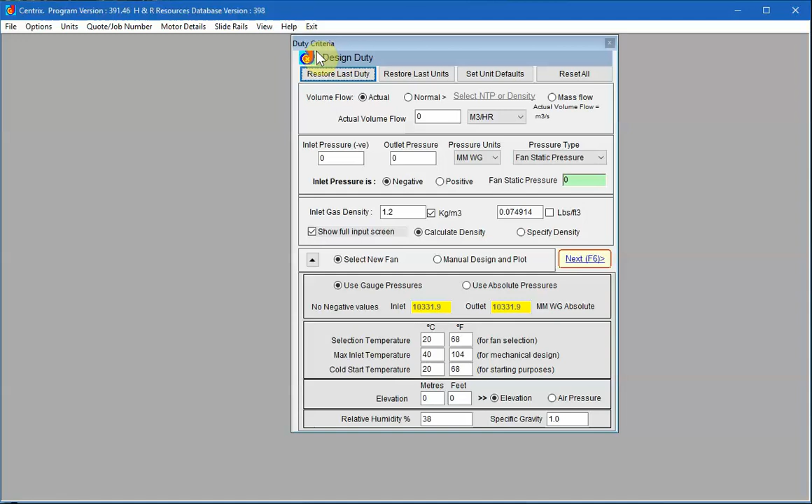Centrix has a large number of motors located in the database. Now, you may want to create a new motor for a particular job. So how do we do that? Well, the easiest way is to copy an existing motor and then save it into the database.

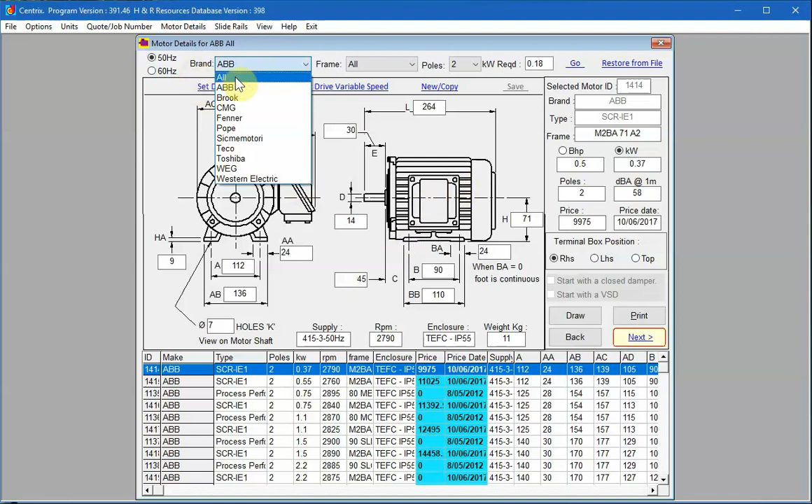So we've got a number of brands here, so we can look at all the brands. 2-pole frames, all 2-pole, 4-pole, etc. We can put in the kilowatts here. So I'll put in, let's say, a 15 kilowatt motor. And we've also got 50 and 60 hertz.

So the first thing to do is, suppose we want a 15 kilowatt motor in some other brand that's not in our list here. And let's say we need a 6-pole motor. Okay, so we've got a 6-pole motor already. Let's have a look at the different ones that we have in the types.

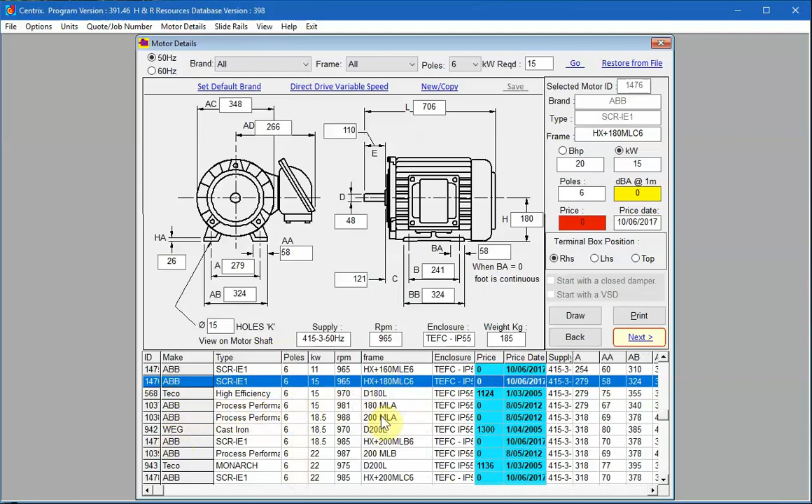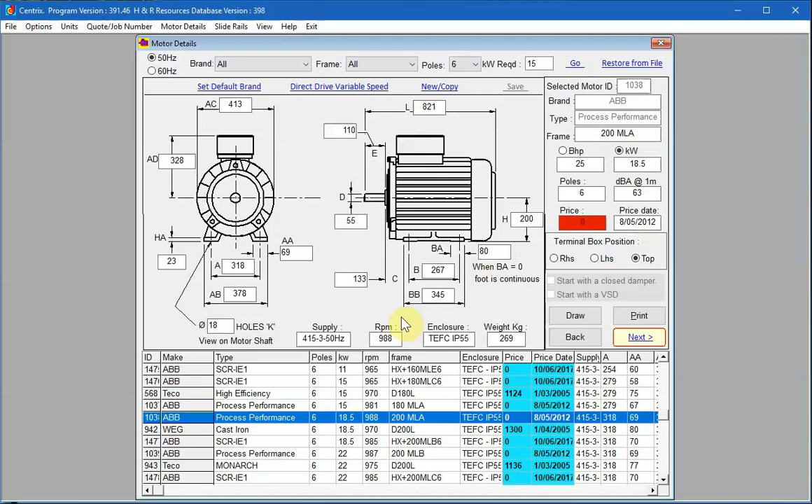We've got an ABB process performance. And we should be looking carefully at the frame sizes here. So we want a 200 frame, and it might be by some other manufacturer. So let's use this with these particular dimensions as our template to create a new motor. So let's just click New Copy here.

Now we can type in the brand. So this is, well, I will call this special brand. The type, well, it could be cast iron, and the frame, we'll say it's a 200L.

Now the RPM's 988. So the best thing to do is to look up these details from the motor catalogue of our special brand here. So let's say that that is 985. The kilowatts might be 15 then, and the poles are 6. The supply may be 415 volts, or it might be 440 volts, or whatever your local 3-phase supply is.

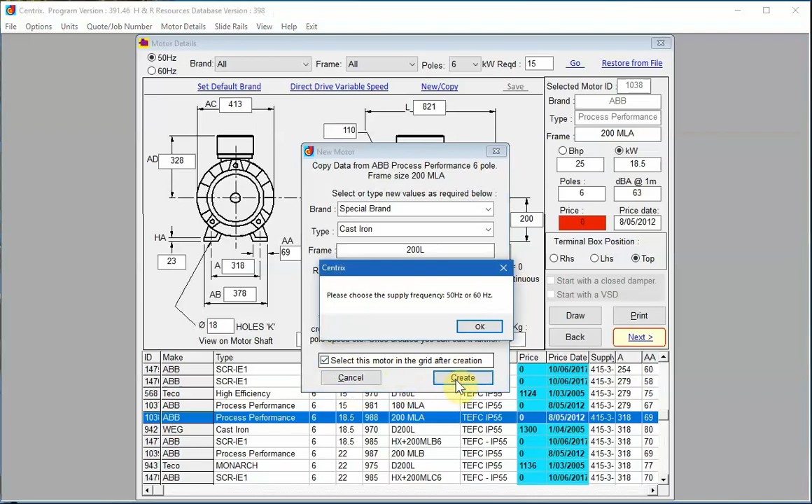And we need to select this motor in the grid after creation. So let's create it. Okay, so I need to choose a supply frequency. It's going to be a 50 hertz motor. So let's create it. And there it is. It's been created. Now we can go through and adjust any of these dimensions. For example, the overall length might be 825.

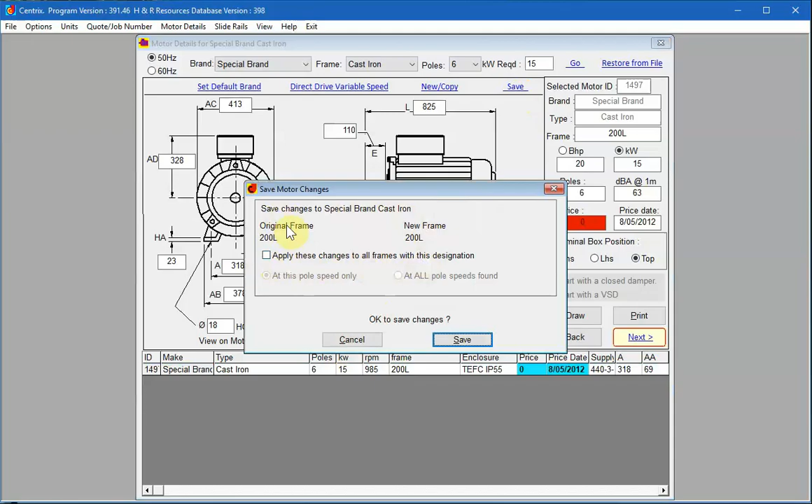So having checked and changed any of these dimensions as needed, we must then save it. So save changes to special brand cast iron. Okay, so we don't want to apply these changes to all frames, we just want to do this one, and we'll say save. And it's available to us now, from now on, within Centrix.

And I suggest you also quickly draw this to scale to make sure it looks reasonable, that you haven't made any mistakes with these dimensions. And that's how we copy and create a new motor from a single frame size within the database. Now, to create a whole list of new motors with their dimensions and possibly prices, it is best to use the price utility, which is covered in a separate tutorial.